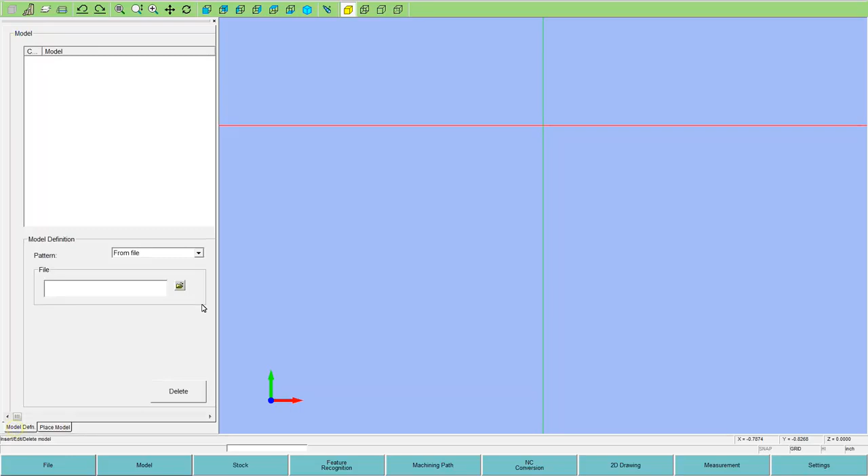So if the 00 is in the wrong spot, you can move the part. So what we'll do is import the file and get that loaded. You hit the little file icon button and you can either import parasolid XTs or XB format. We'll bring in part 1, click open.

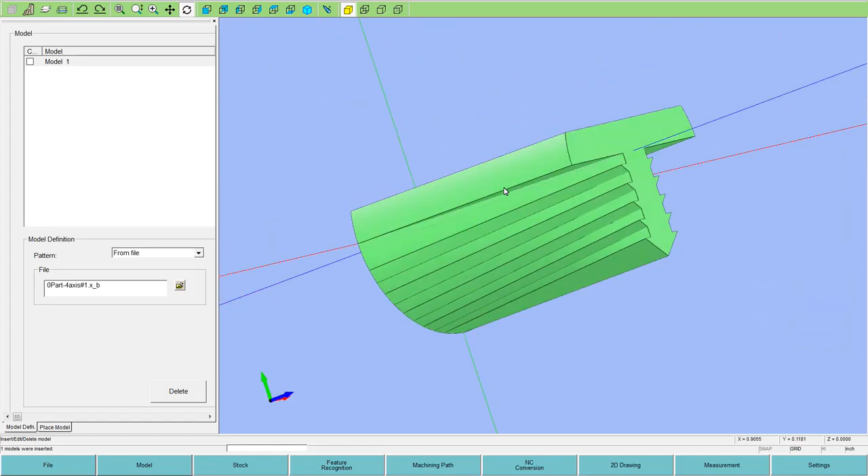So here's our punch. I'll put it in isometric view. And with the wheel of the mouse, I can free rotate the part on the screen. Hit ISO view, top view. I can zoom in and zoom out with the wheel of the mouse too.

So the first step would be to make sure you have the part oriented for 00. If not, they give you this place model function. I'll do a future video on how to move the part around and shift your 00, but this is what this is for, to put your 00 at pickup of the block.

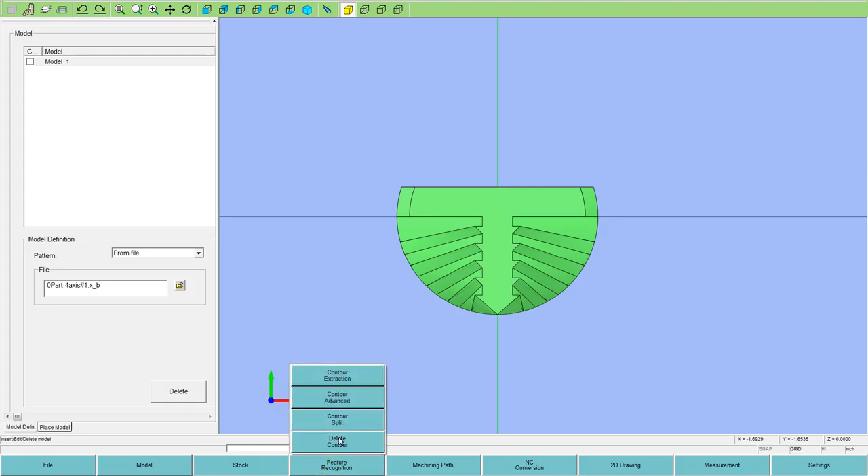To program the part, first step is to do what we call feature recognition and the contour extraction page. In here, it's going to find the thickness of the model already, that fills out automatically. Then you say if you want to search the model for all shapes, punches, or die cuts.

Or you can say just search for die shape cuts or just search for punch cuts. This only has one model on the screen and there's no holes in it or anything, so we could say all or punch, no difference. Then you hit extract.

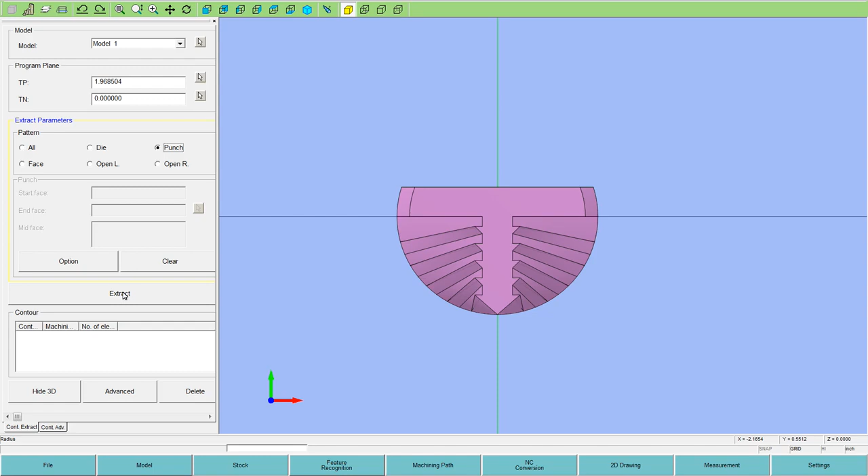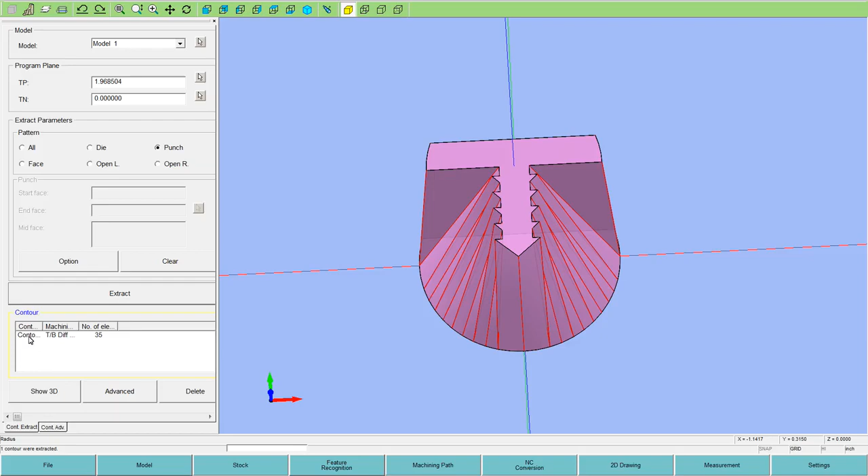So what this step does is search your entire model for everything that's wire EDMable, holes or outer cuts, punches, dies, and so forth. Being this is a simple model, it finds the one cut and it shows it to us here at the bottom and in the bottom left. If I click on it, it lights up this green color, so that's what it found, which matches the model.

Okay, next step is to put a start hole on the part. So I'm going to put one up here at X0 and Y. If you look down in the bottom right, it gives you where your cursor is right now. So if I just freehand one in here, I'm going to want to put it at a position that I know of.

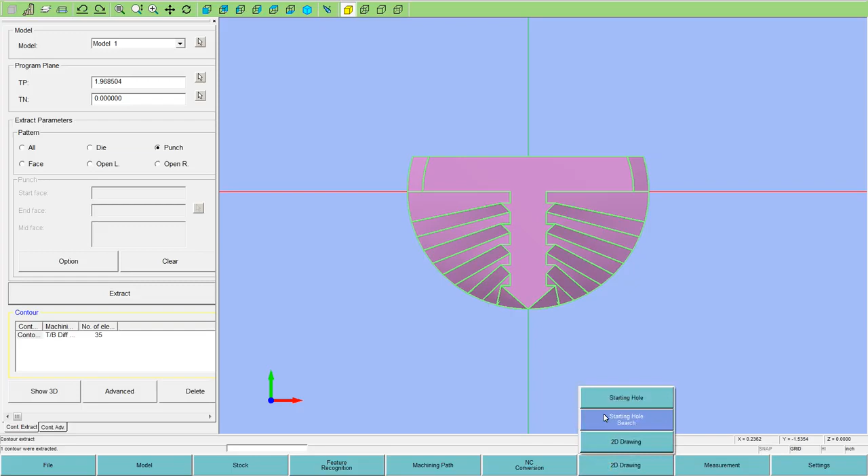I'm going to put it at Y.5. So I've got the mouse right now at 0.55. So I will turn on the starting hole function and I will put it at Y.5. And it creates a little wire start hole for us to use for the tool path.

Now, if you're doing a die with multi-holes, multi-pockets in it, it has a function to search the entire block. There's a starting hole search function. So if you have little circles drawn in for your start holes, it'll search for those.

And you would go in here and tell it what the max size is for your start holes, and it'll search all your circles. And if they're within that size, instead of cutting circles, it changes them into wire starts.

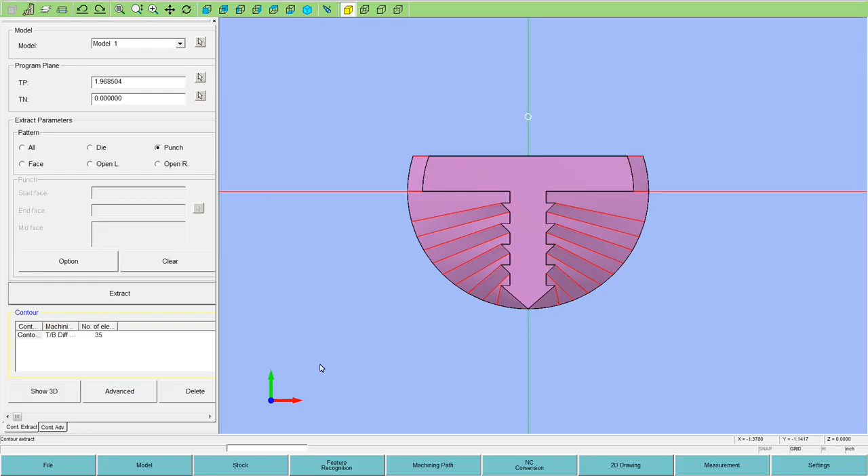Okay, next step is machining path and path generation. And we are going to turn on the automatic, which is to automatically find the start hole, that's what that's for. And hit generate path.

First thing is to set the power settings for the wire EDM machine. We fill out this menu for your wire size, wire kind, workpiece kind, and workpiece thickness. It's almost 2 inches, so I'll select that one.

Punch, nozzle position. If you're going to have your flush cups close, top and bottom, you could pick that. If you've got to set the block up where the upper head's distanced away off the top, you pick open, and how many passes you want to take. So I'll have it set for 3 passes or up.

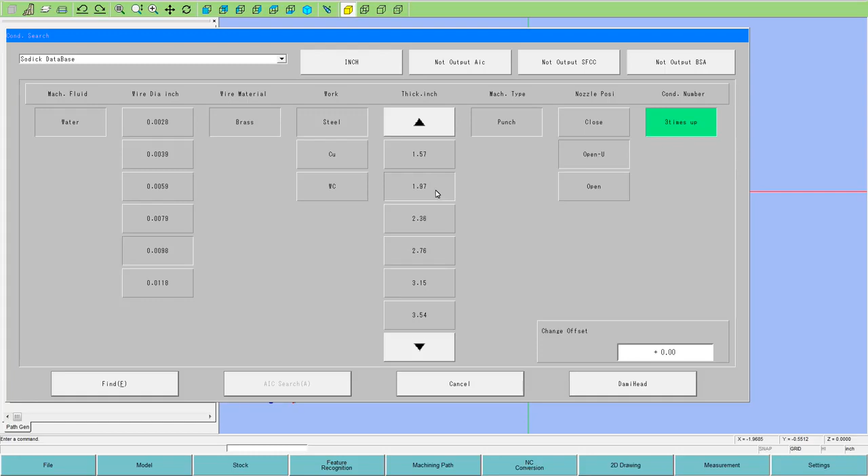Now this menu here that's displayed right now is not the same one on the machine. This is not configured right now. This is my PC, not the machine, so it's not connected to the machine in any way. When you run the desktop version, you have to have the right database which matches your machine in the software, which I do not have at this moment for this machine. So anyway, I'm going to set that kind of generically to move on forward.

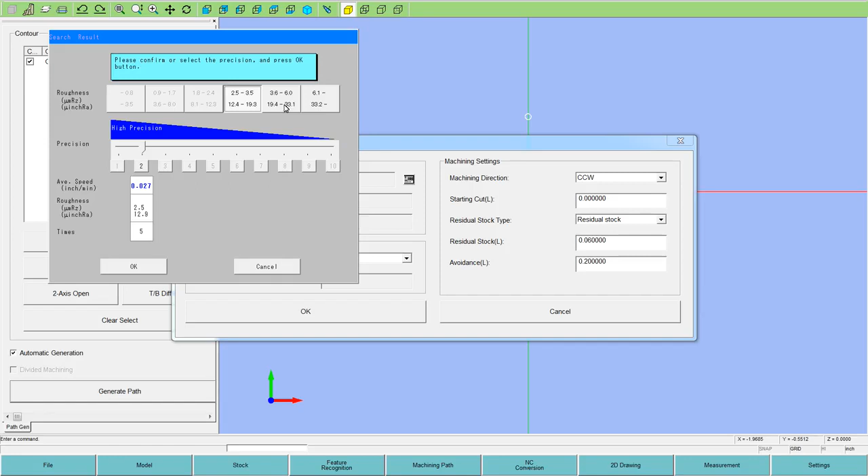Next step is to set your glue stop. So we'll put the stop width, tab width here in the residual stock at 50 thousandths. And the avoidance, this is going to be the little move when it makes the punch. It's going to cut around to the tab position and back off the shape to retract off the face. And I'll put in 50 thousandths there too.

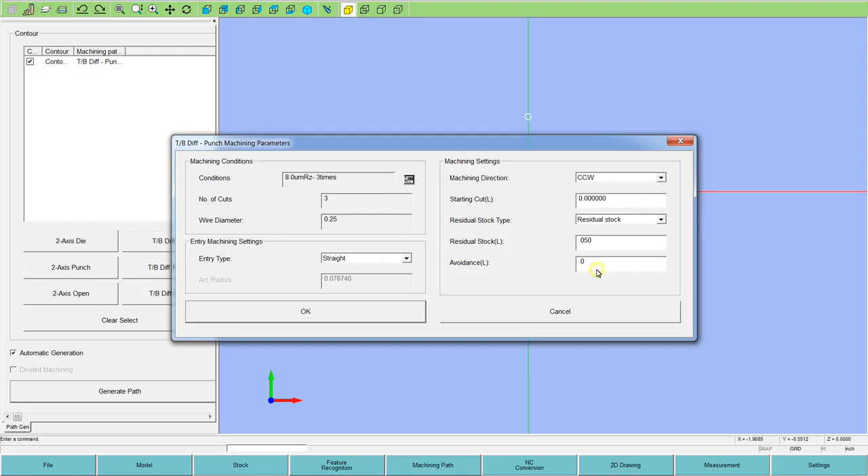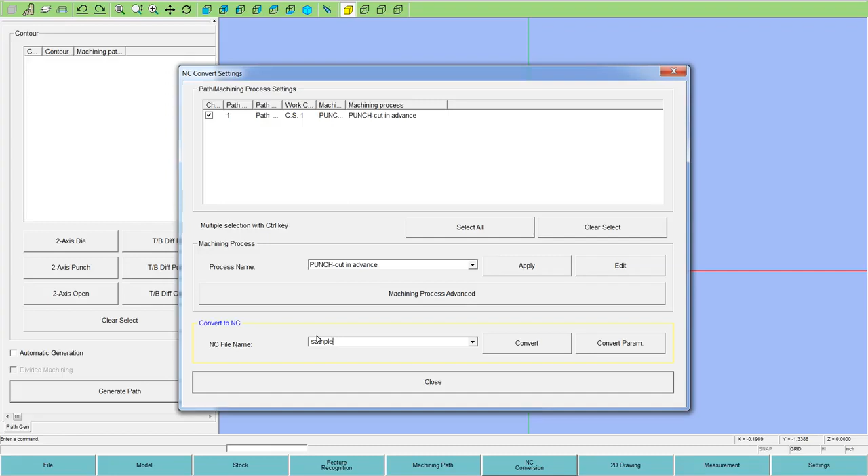And it's completed, so the program's completed right now. This is the little glue tab hold on, and that's the little retract that they call avoidance. Now we go to NC conversion, convert to NC, and put a name in here. We'll say sample 1, and we'll convert.

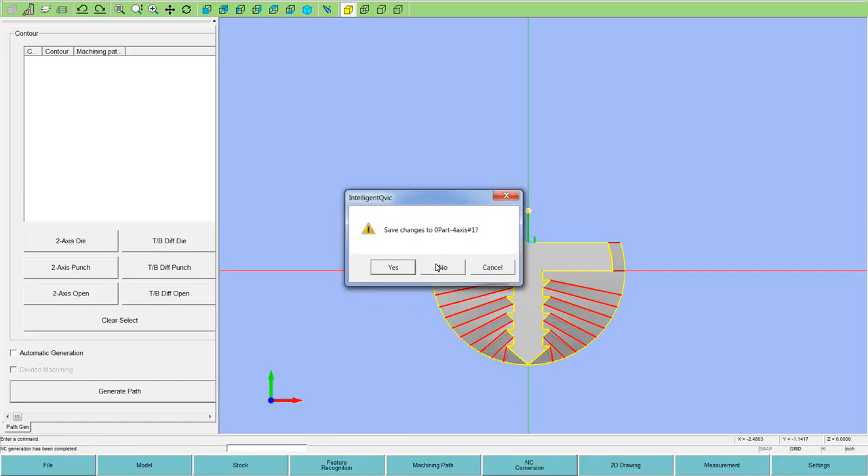Now if you were at the machine, you hit the graphics button on the machine when you're in the edit page, and it'll draw the G-coded program up as a graphic. Being it's not attached, I'm not at a machine, I don't have that window. So let me exit out of here, and I will show you the code that it just created. And it's in my IntelligentQvic NC files, and here's sample 1.

So this is the G-code program that the IntelligentQvic made. It's a program ready to go to the wire machine. We have our cutting power settings here at the top for the 3 cuts, C1, 2, 3. And our offsets, H1, 2, 3, are sitting here at the top for wire offset compensation. Then the regular program begins here at G90 and on down. So there's your 3 passes.

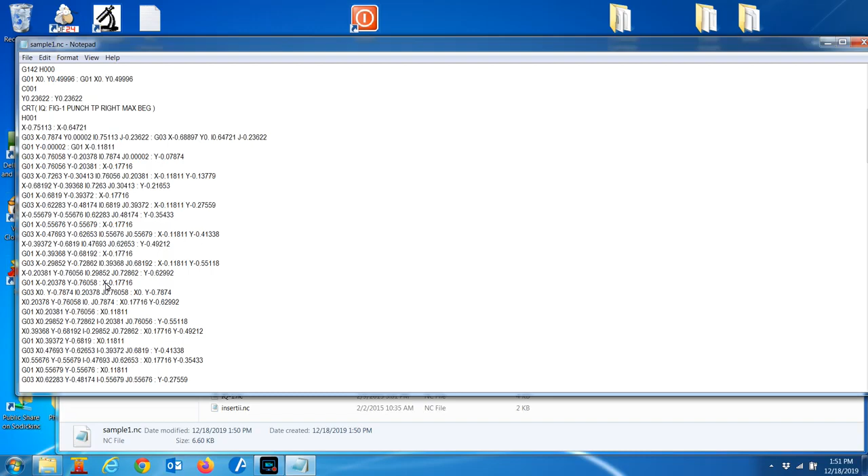One thing to note, we're a 4-axis program, but our control does 4-axis with circular interpolation. Some of the older controls don't have the advanced capability that a Sodick has, and it writes a G01 XYUV format program, even though you're doing arcs, breaks the program up into all line segments. On a Sodick, it doesn't work like that. You got true geometry, G03 XYIJ, then there's a colon here, and another G03 XYIJ.

So this is the bottom geometry on the left with the top geometry on the right. Bottom, top. So it's two-axis programs basically sandwiched together, isolated by that colon. It's a unique format for 4-axis on wire EDM. We've been doing it this style for over 20 years now. So it gives you true geometry for 4-axis, because a circle or a corner radius is a G03 or a G02 code instead of broken up into maybe 10 or 15 straight line moves.

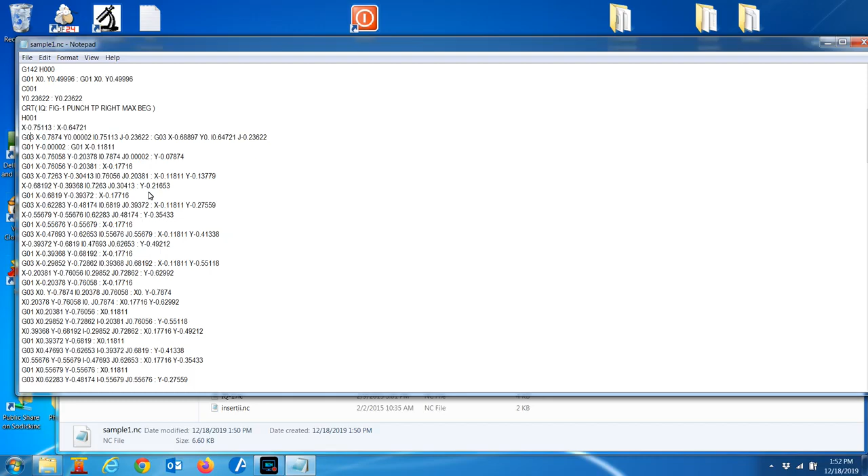So that's sample 1, 4-axis punch example.